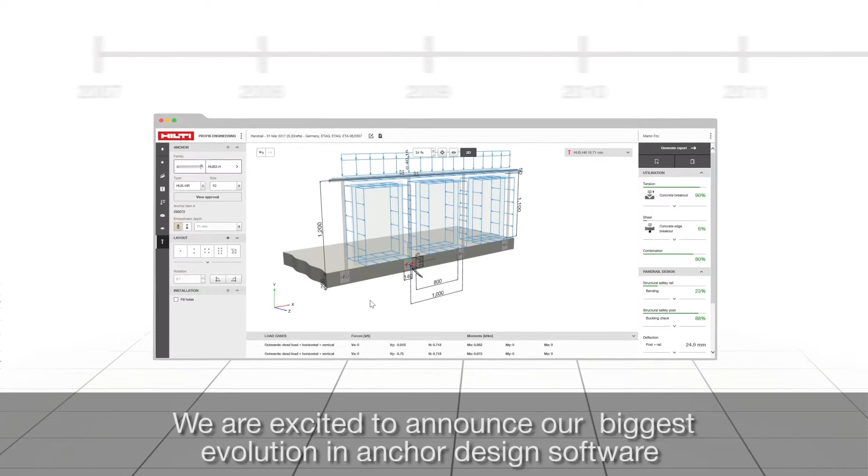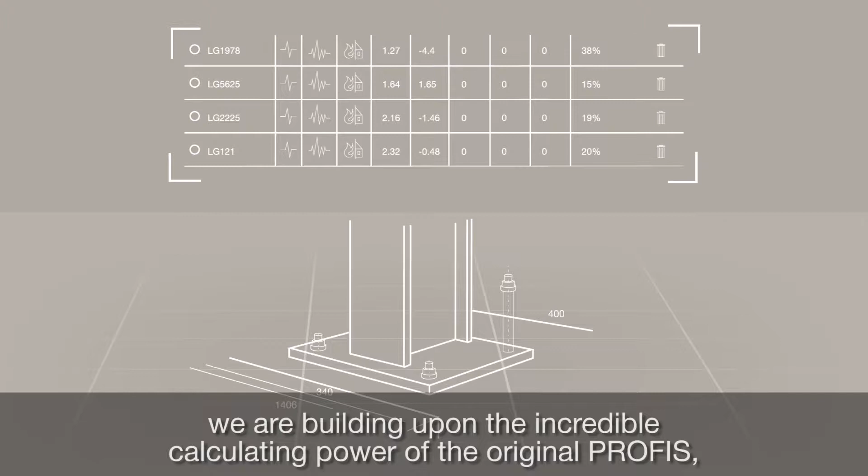We are excited to announce our biggest evolution in anchor design software since the launch of PROFIS 10 years ago, the Hilti PROFIS Engineering Suite. We are building upon the incredible calculating power of the original PROFIS by integrating improvements that will save you time, streamline your processes, and support project team collaboration.

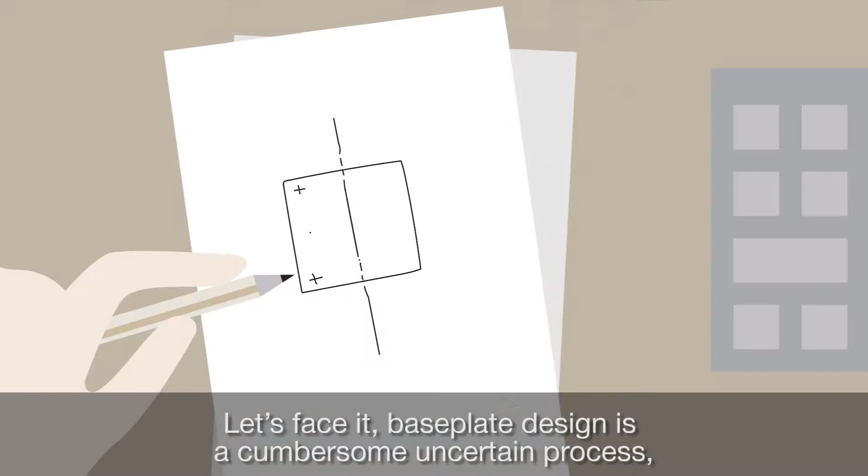Let's face it, baseplate design is a cumbersome, uncertain process. To start, rigid baseplate is a theoretical concept, and it's difficult to know how close a baseplate is to rigid.

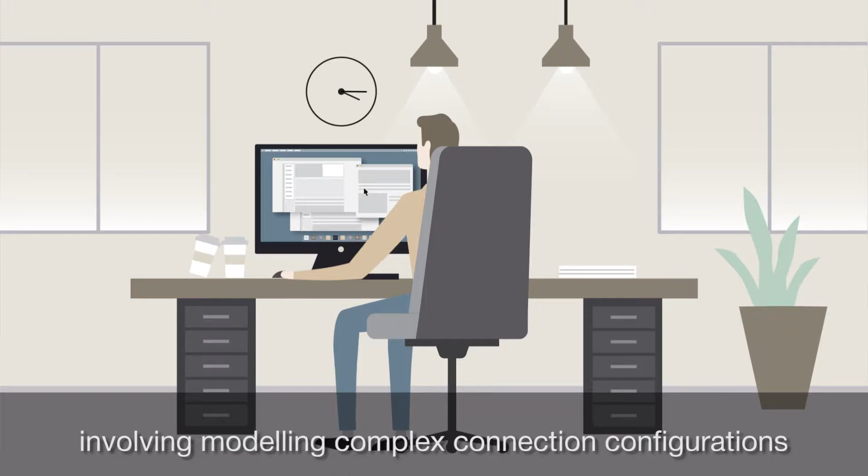Once baseplate design begins, it's often extremely time-consuming, involving modeling complex connection configurations, performing several hand calculations, and then spending hours compiling information from various programs just to produce a report.

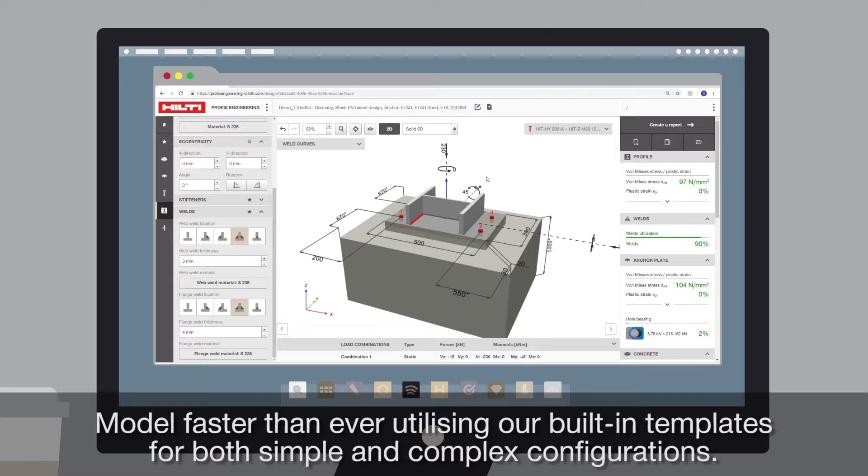The advanced baseplate feature of the PROFIS Engineering Suite radically simplifies this workflow, bringing you industry-leading efficiency and accuracy. Model faster than ever, utilizing our built-in templates for both simple and complex configurations.

Quickly design the entire steel-to-concrete connection, including the baseplate, anchors, welds, stiffeners, and the concrete stresses. Check how close your baseplate is to the ideal rigid baseplate. Easily iterate until you find the best solution for your project.

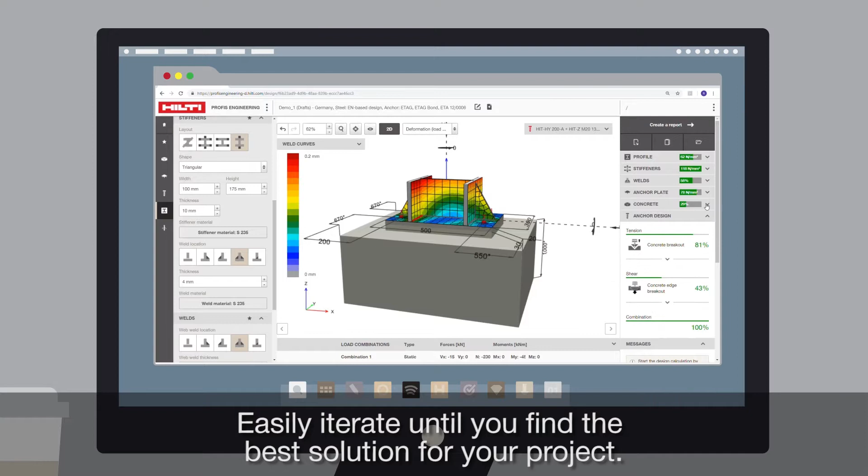Once complete, generate reports with a simple click of the button and add section-specific comments. PROFIS Engineering takes the guessing out of baseplate design and streamlines the verification process through thorough documentation.